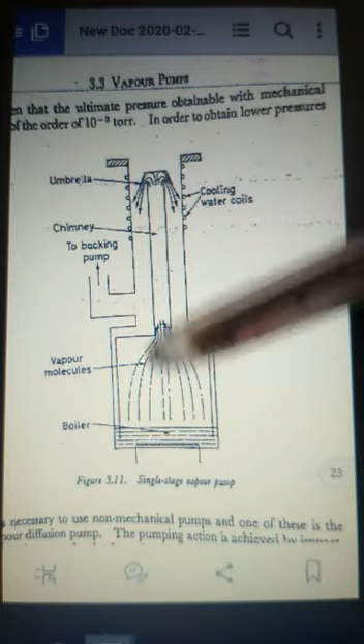Here we boil the oil, and this vapor goes up into this region. Here we get the vapor of the oil molecules, and this vapor combines with the gas from the system.

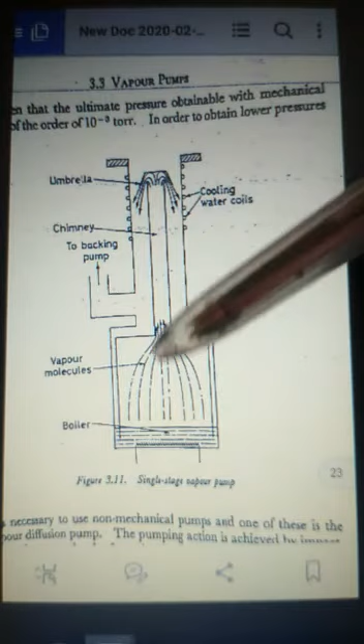This vapor combines with the gas and condenses, and the gas will exhaust here. Again these vapor molecules convert into liquid and collect here. This process is repeated.

The pumping action is achieved by imparting to the gas molecules from the system a momentum in the direction towards the exhaust by means of a high speed stream of molecules. The principle and operation is illustrated as shown in the figure.

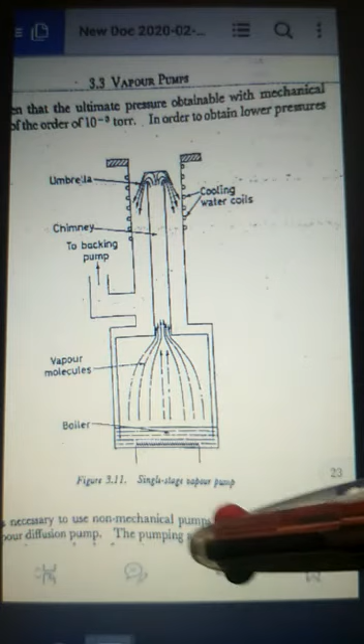The pump consists essentially of a cylindrical body at the base, which is a boiler containing suitable fluid. Provision is made for cooling the upper part of the body, either by water coils.

A chimney projects from the boiler, and mounted above the chimney is an umbrella shaped deflector or jet. The vapor molecules from the boiling fluid travel up, moving in a stream at high speed.

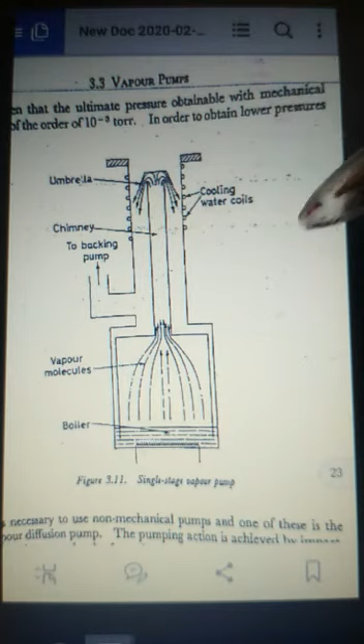The gas molecules which enter the vapor stream gain considerable downward momentum as a result of collision and are swept towards the exhaust. The vapor essentially collides with the cool wall, then condenses to liquid and flows back to its boiler.

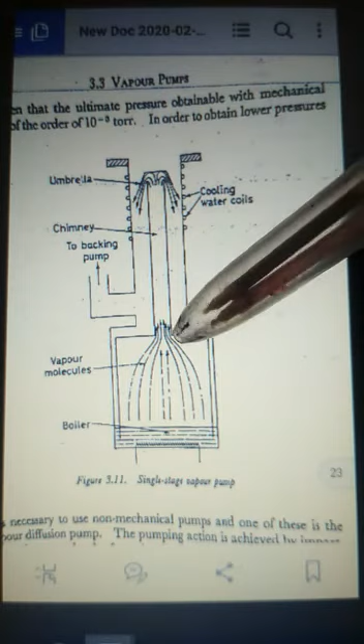But the efficiency is very low when we use only one jet. That's why the efficiency of the exhaust gas is very low. That's why we use a multi-stage vapor pump.

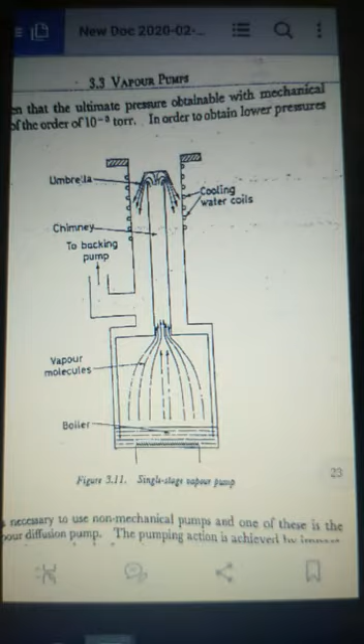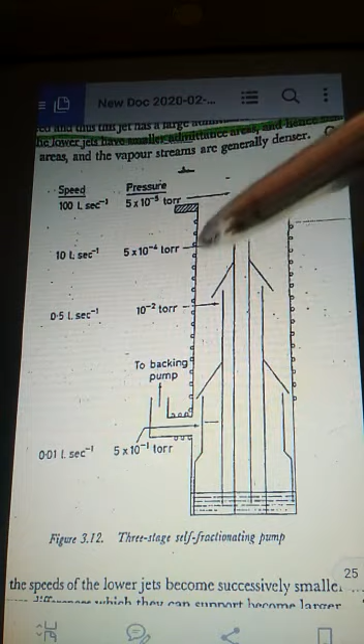In order to achieve high pumping speed, the pump must see a large area of the system so that gas molecules enter the vapor stream at a high rate. Hence the jet admittance area - this is what we call the admittance area between the jet and the wall of this tube.

However, a large admittance area implies a large escape area for back diffusion of the molecules. This makes a large number of collisions occur within a very short distance of the jet.

Since the pumping speed is the net rate of removal of gas from the system, it is very high, and a high back diffusion rate implies a low pumping speed. Obviously, when the back diffusion rate equals the forward diffusion rate, the pumping speed is zero.

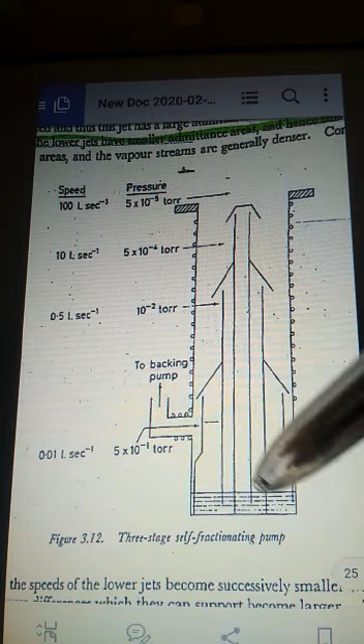When back diffusion equals forward diffusion, pumping speed is zero. That's why we increase the forward diffusion rate much higher than the backward diffusion - only then do we get a very high exhaust gas rate.

The system pressure must initially be reduced to below a certain value, which in most practical cases is of the order of 10 power minus 1 torr. The pressure below the jet must be kept reasonably low to reduce the probability of back diffusion.

To achieve these conditions, vapor pumps are constructed with several jet stages. Here we use 3 stages, 1, 2 and 3 in series, one acting as backing pump to the other.

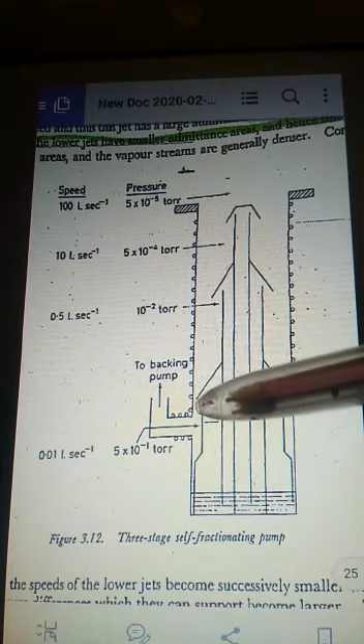This one acts as backing pump for this jet, and this one is back pumping for this jet, and so on. Finally we get the exhaust gas as shown in the figure.

The main function of this jet is to give large pumping speed, so this jet has a large admittance area. On the other hand, the lower jets have smaller admittance area and smaller escape areas, and the vapor streams are generally denser.

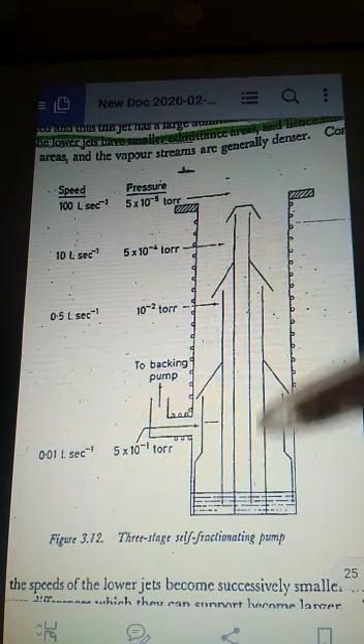Consequently, the speeds become smaller and the pressure differences they support become larger. It should be noted that throughput is necessarily constant throughout the pump - that means throughput, the product of speed and pressure of the system, is constant throughout the tube.

Up to this is the action of the vapor vacuum pump. Next we go to the vacuum gauges.

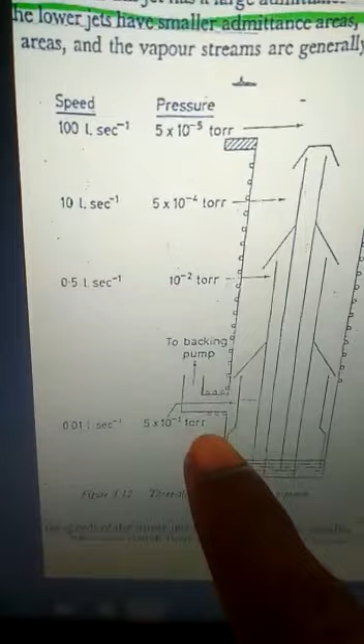Thank you for watching. This also shows the speed of the gas molecules in this region. First region, 0.01 liters per second, and lastly we get 100 liters per second - this is the speed of the pump.